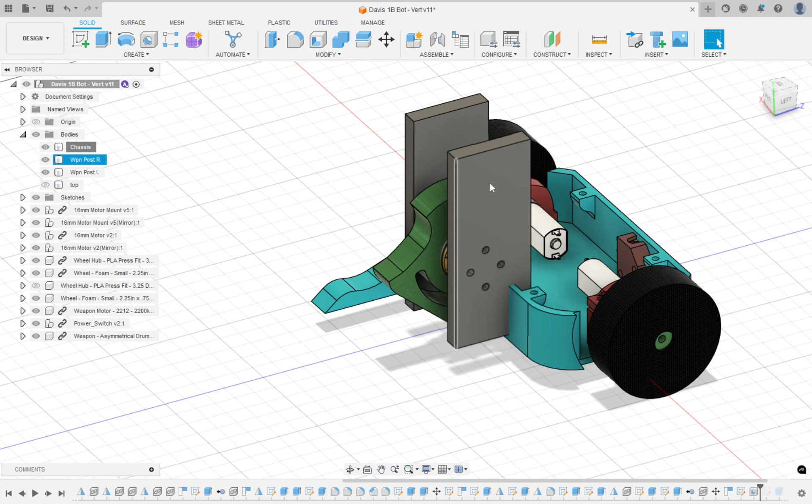All right, so in this video, we're going to go over how to merge these weapon posts with the body and also how to make a hole in the weapon post for the weapon motor on the inside. All right, so our first step is we want to get rid of these weapon posts using the eyeballs.

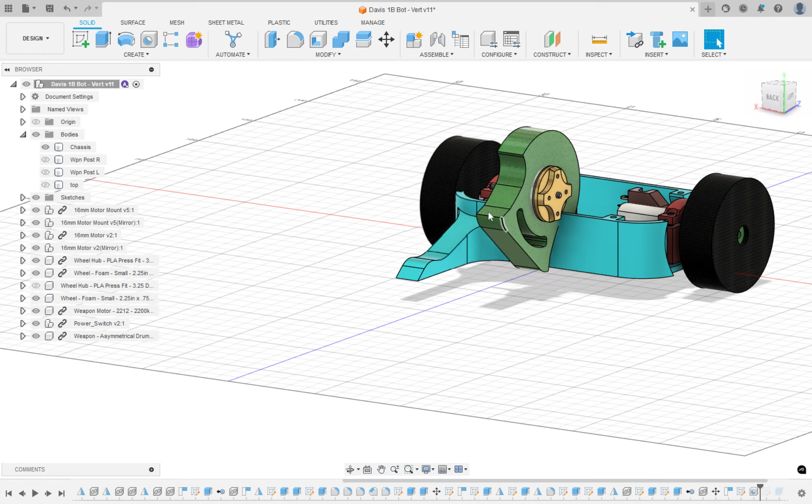And you see this little nub right here? This nub is kind of in the way, so we have to make a hole for it on the inside of the weapon post. So I'm just going to change my view real quick. All right. And I'm going to bring back the weapon post that's next to the one with the 4 holes. For some of you, it might be the left one. For some of you, it might be the right one. So I'm going to bring back my right one because that's the one I need.

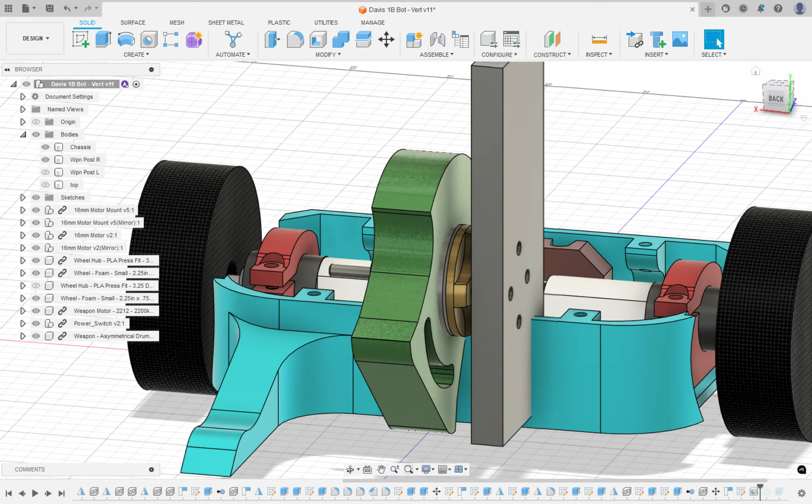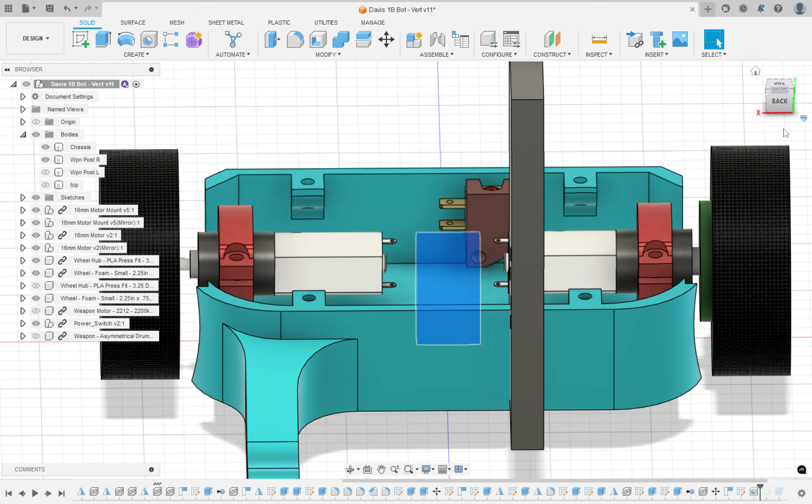Now, I'm going to get rid of the weapon motor and the weapon so I could see my weapon post. So I'm going to find it. I can easily find it by clicking on it and it'll underline so I know it's this. Now I could click on the weapon motor and it underlines so I know it's that. So now I just have the weapon posts. All right, so what I have to make is a little divot, a hole right here. So I'm going to create a sketch on the inside face of my weapon post.

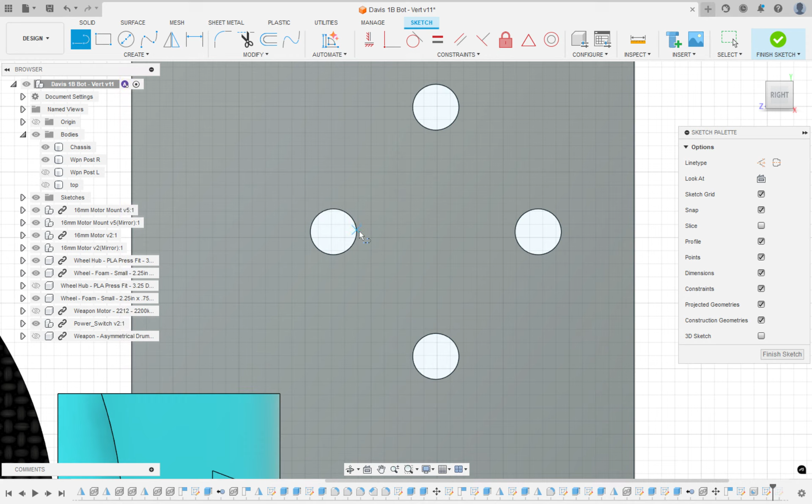And the easiest way to do that is using the line function and a point. So it has to be in the center. So I can either make a line between here and here or a line between here and here. So I'm going to hit line. I'm going to make sure it turns into a circle. I'm going to go all the way to the other one, make sure it's a circle. And it's going to want to create another line, hit escape for that.

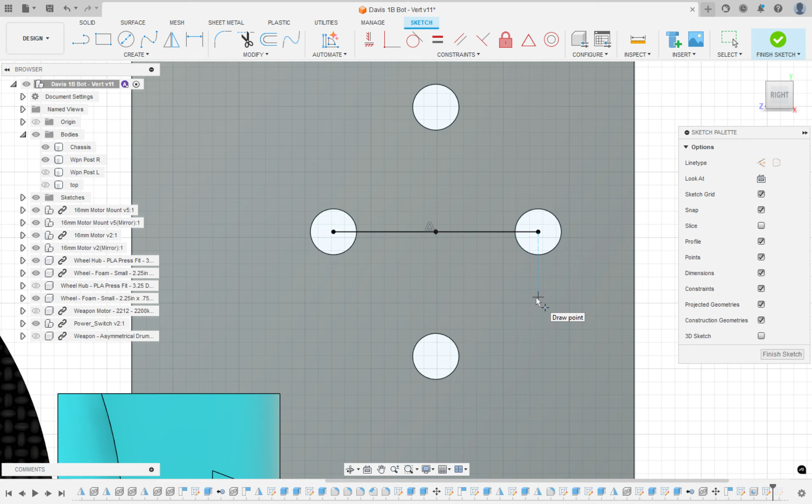Now I want to make a point in the center of that line. So I'm going to go to create point. And you just slide your mouse along the line. And remember, a triangle is going to pop up whenever you reach the center of a line. So I'm going to click. Now I have a point. I'm going to hit H for hole because I want to make a hole there. And it's asking me, where do I want to make a hole? Well, I want to make a hole on this point.

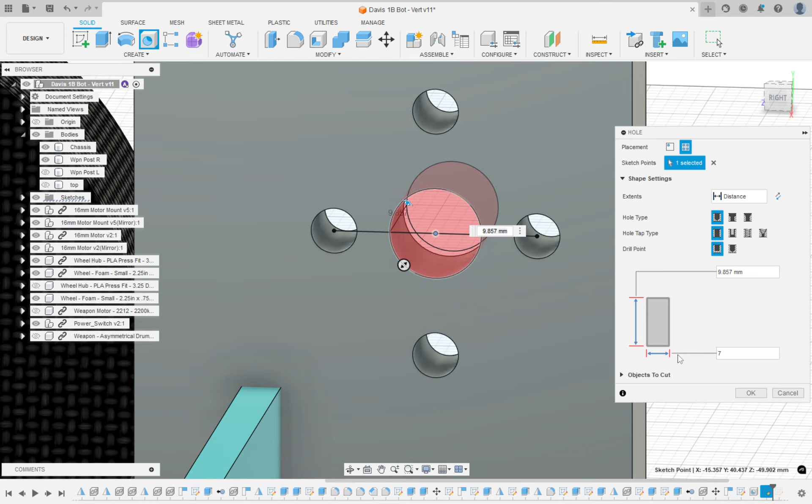Now, the hole, though, has to be 7 millimeters in diameter, so 7 millimeters wide, and it has to go in the post 2.5 millimeters. So what that means is always change drill point to flat, which I'm going to do right now. I'm going to make the width of the hole 7. All right, if you look at the image, it goes how wide the hole is. It's 7. And now I want the hole to be 2.5 millimeters deep. So I'm going to type in 2.5 in this box.

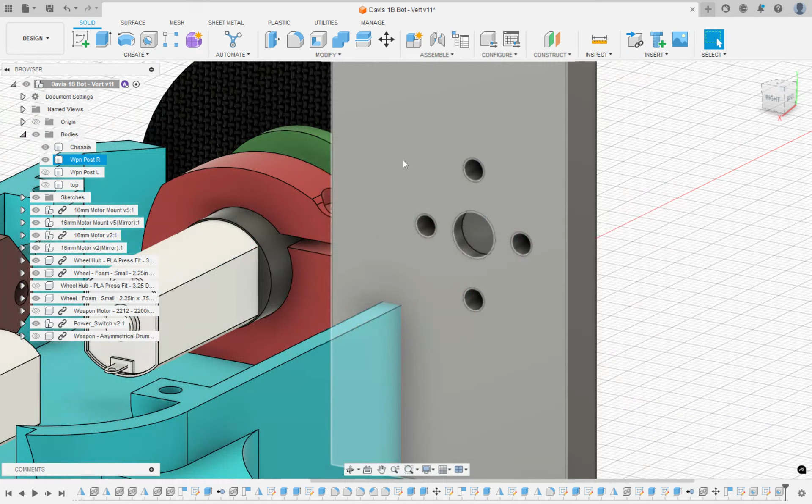And now I have a little divot for my weapon motor's butt to sit in. I'm going to hit OK. And now I have a hole here. Now that's what I wanted. All right. Now, what I can do is bring back the weapon motor and the weapon. And you'll see there's a little space for the weapon motor to sit in, which is what we wanted.

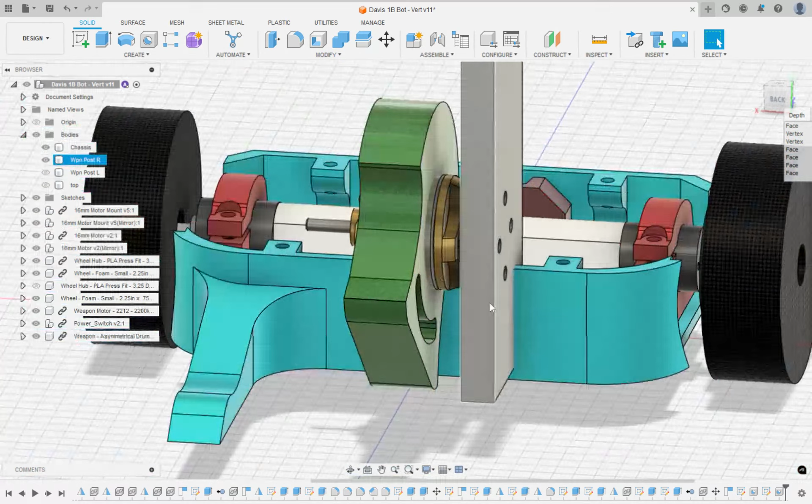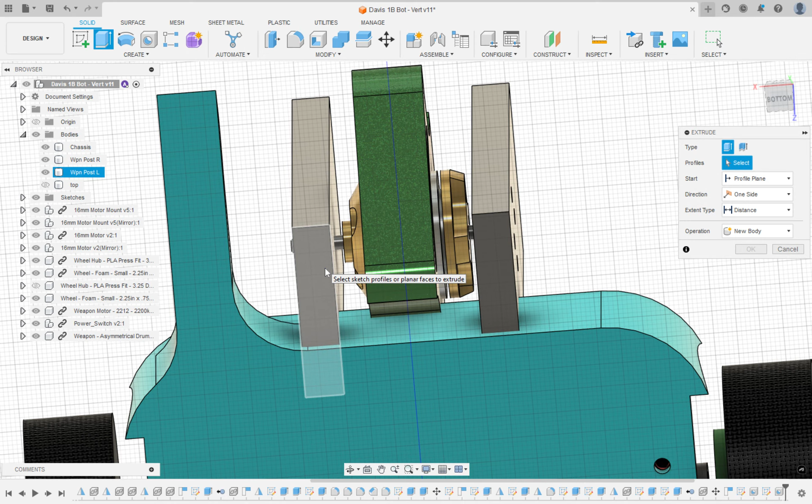Next step is we want to merge these weapon posts with the body. So I'm going to bring back both weapon posts. And this is really simple. We're just going to extrude both of these bottoms to the body, make sure it's on join, and it'll merge. So I'm going to show you how to do that. I'm going to hit E for extrude or click on this icon up here. I'm going to click on, for example, the bottom of this one. And I want it to extrude as far as the bottom of my bot.

So I'm simply going to click on the bottom of my bot. And now it's kind of merged and you can see the color get all funky. It's on join, that's good. I'm going to hit OK. And now it matches, and you can see there's no seam there. So it's part of the body.

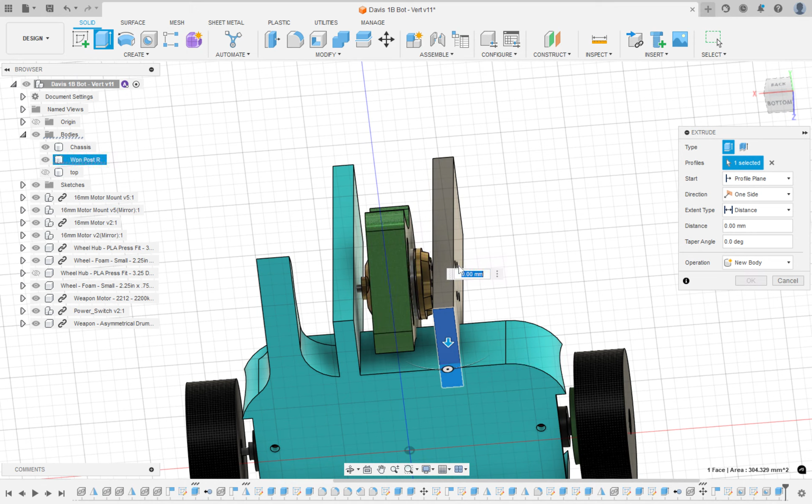I'm going to do the same thing for this one. Click here, I can hit E for extrude or click on that icon. I'm going to click on the bottom of my bot. It gets wonky again, make sure it's on join. Hit OK, and now those parts are part of my body. I could tell because if I click on chassis, it's all one part.

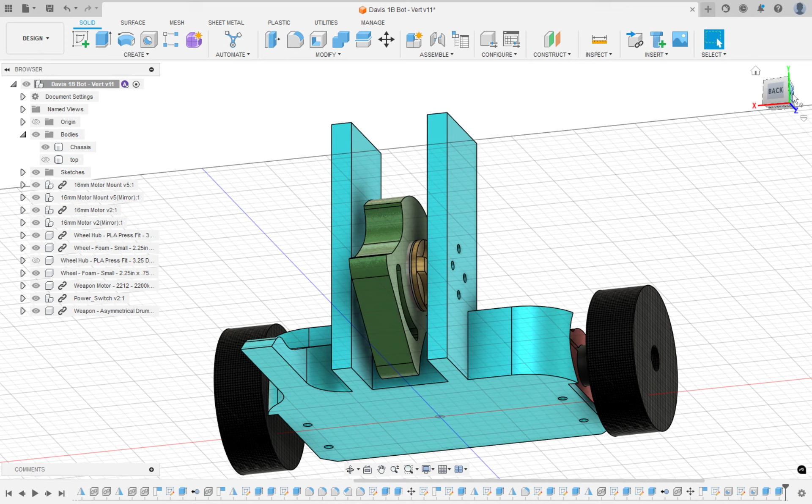That's how we need it. So now we have to shape your weapon posts. Your weapon posts are probably too big, they probably come out too far. So what I'm going to do is show you what shape they should be in, or what shape they could be in. You could do whatever you want.

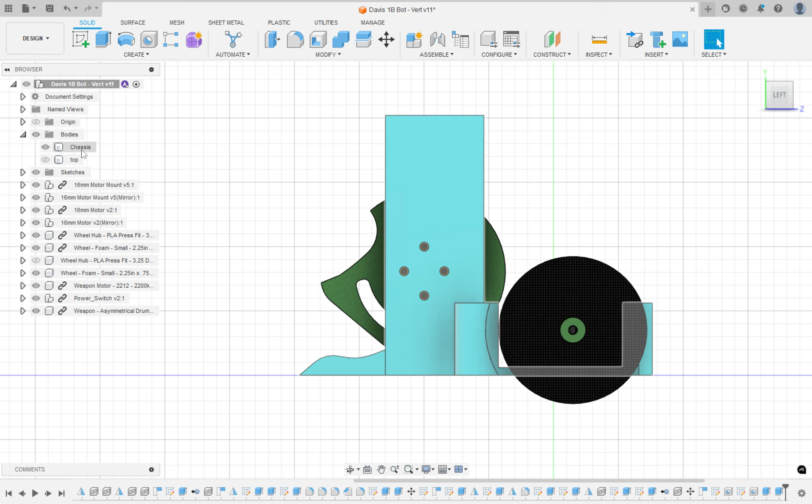So the first thing I want to do is make this body see-through. I right click on, well if your arrow's not open, click on it to open. I'll right click on my chassis, go down to opacity control, change it to around 40 or 50. I'm going to actually make it 40, a little more see-through. Now I can see through my bot.

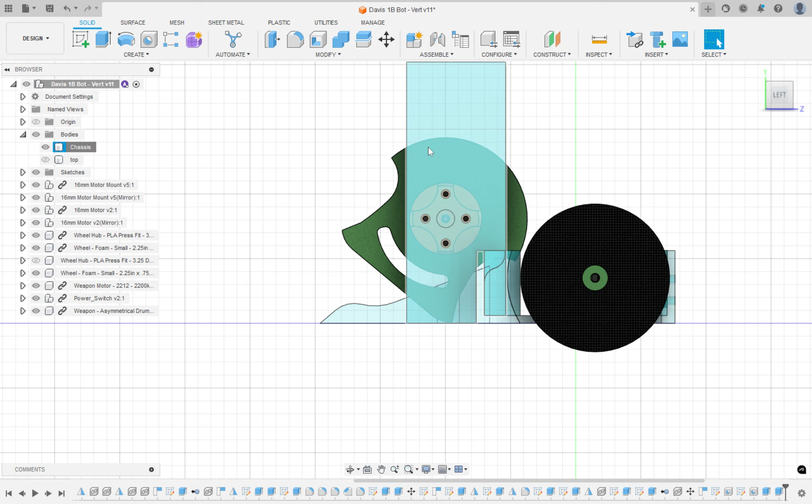Basically, you have to keep material around these 4 points, right? But I don't need all this extra material right here. So what I'm going to do, and I actually don't need much of this material above where the weapon motor is either, is create a sketch on this face right here.

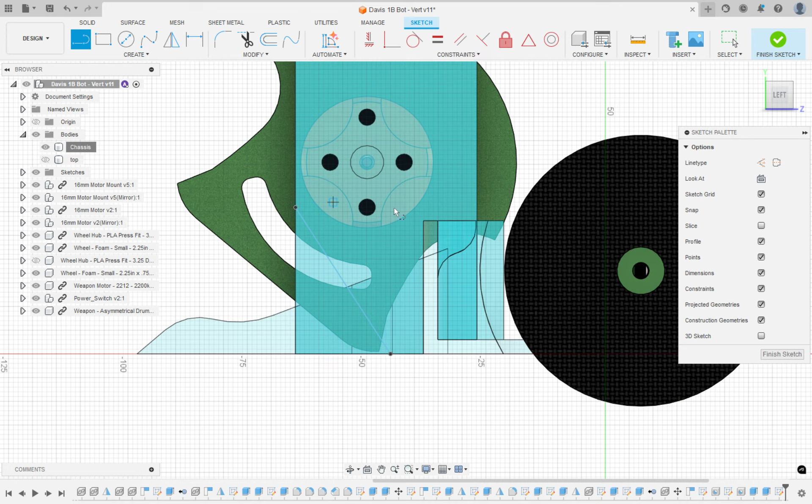And I'm just going to make a line, maybe from, I could either do the back corner here, or this corner here. Maybe to add more material, I'll probably do it right around here. And I'm just going to bring this line up to here. Now all this material right here, I do not need.

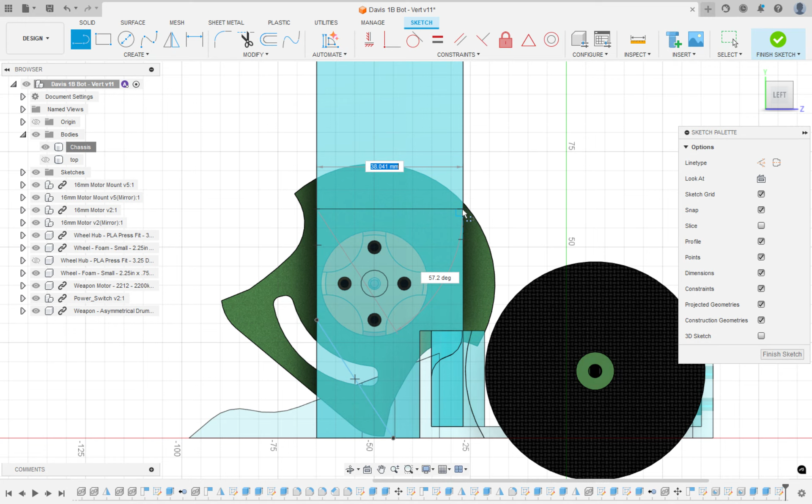And you know what, let's get all this material above this, I don't need this either. So I'm going to make a line that goes straight across, lock right here, and I'm going to get rid of this top section and this bottom section.

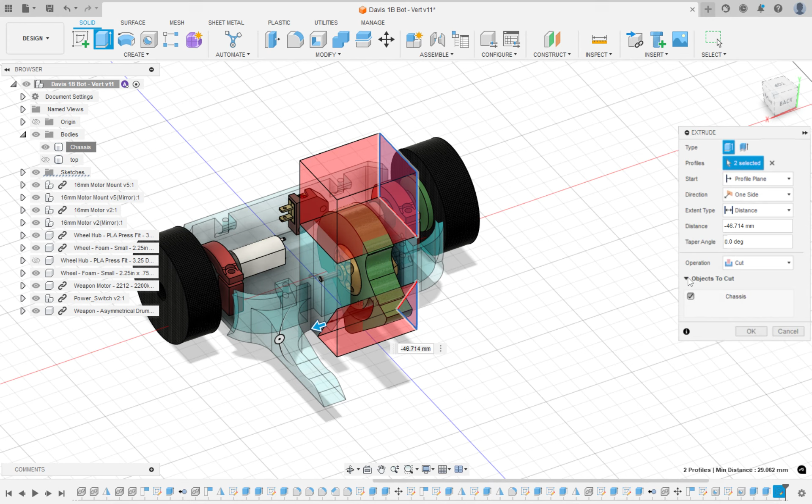So I'm going to hit E for extrude. I'm going to click on this and this. And what I'm actually going to do is, instead of dragging it through just this one post, I'm actually going to drag it through both posts. So I could simply do that by clicking on how far I want it to go, which is the opposite side of the other post. And now I kind of cut through both things. I want to make sure though that I'm only cutting the chassis and not anything else, and I am, so I'm going to hit OK.

All right, so now my weapon posts kind of look like this. I'm actually going to make it 100% again, so I can see what it looks like.

And now, one thing that does have to be tall is that my weapon posts have to be taller than the highest point of when the blade is going to spin. So if you're upside down, you can drive on your weapon posts and your blade can still spin. So the way I'm going to do that is I'm going to rotate the, oops, I did something accidentally.

I'm going to rotate the blade to its highest point. So I'm going to click on it, see which one it is. It's this one. I'm going to right click on it in the list, go to move copy, click on rotate, click on any of these center circles. I'm just going to rotate it to its highest point. So I think that's, then the blade is slanted a little bit, is its highest point.

Maybe kind of around there. All right, I'm gonna hit OK. So now my blade's at its highest point.

Now I don't like the square look of these, so I'm gonna round these off. I'm gonna hit fillet, or F for fillet. I'm actually just gonna click on the icon. I'm gonna click on maybe this one and this one and this one and the other one at the front of this weapon post.

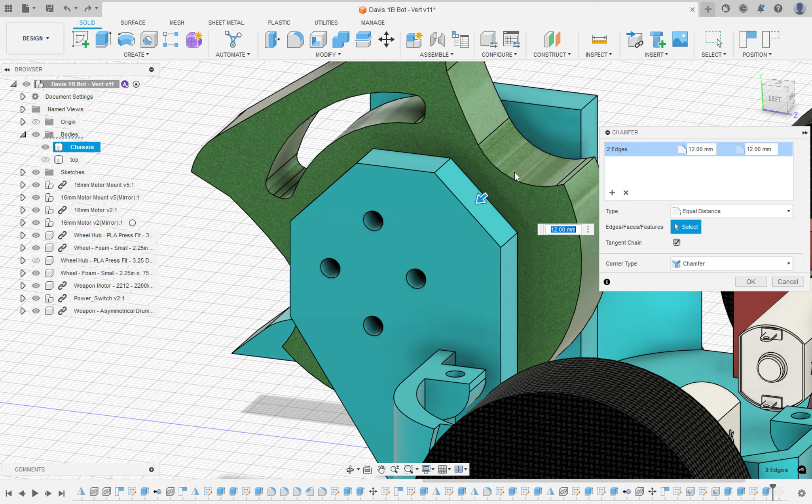All right, so I actually think I'm going to do that. So I did it 12. I could click on this plus sign and add these two as well.

All right, and I could drag it 12 millimeters. I think it was 12. All right, hit OK. So it's up to you what you do.

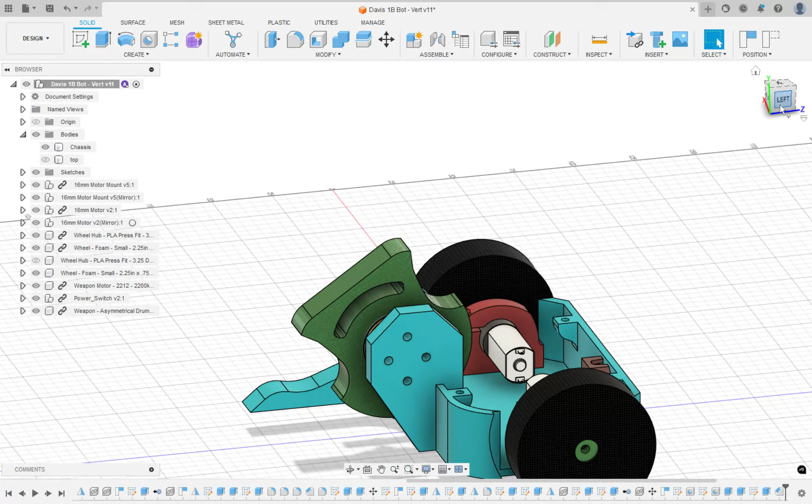The most important part, though, is I need a little piece of material sticking higher than my weapon blade spinning. So I'm going to create a sketch on this face right here. Always hit capture position.

And let's see, I could just do a line. Maybe that's here, here, maybe down here. Doesn't quite matter. I call these bunny ears.

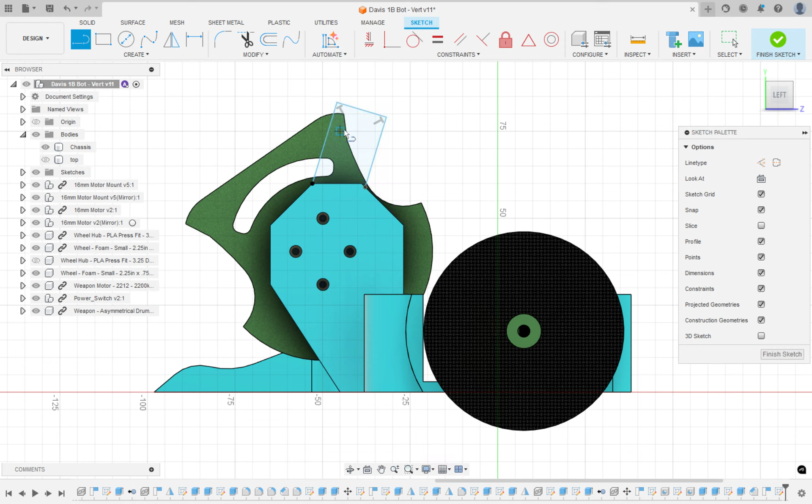Oh, my son is calling on my phone. Hold on. Oh my God. Hello? Yeah, I was recording something. What's up? Okay, I'll do it. All right, bye.

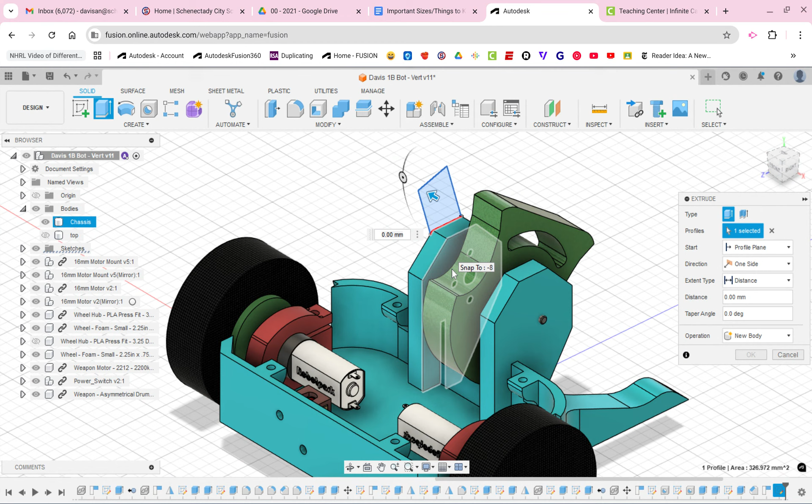All right, sorry about that. So I just made like a square and I'm gonna extrude it to the other side of this post. And now I have like a little bunny ear. I'm gonna hit okay.

All right, I'm gonna mirror that feature real quick. Create, mirror, feature. Yep, I'm gonna do that last extrude here in the timeline.

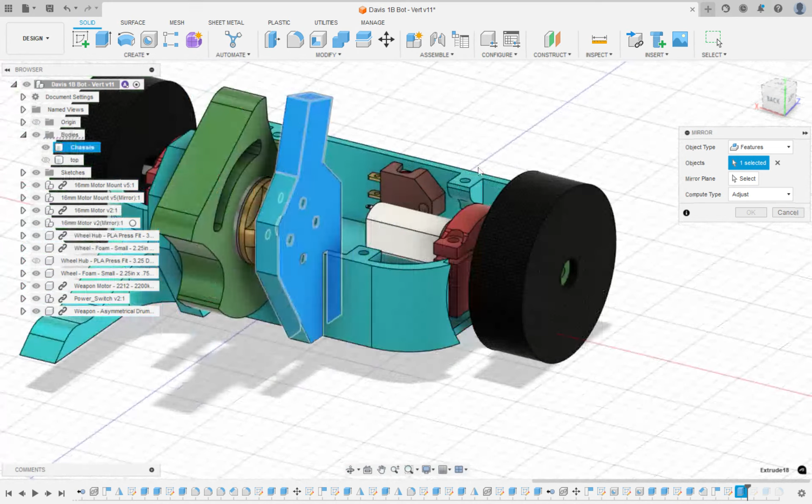Click on, oops, all right, mirror plane, hit the select button next to it, click on this one. Now you'll see that it's added there, hit okay. Now I have a bunny ear on the other side.

All right, but to be honest, I don't like the sharp corners, so I'm gonna fillet these corners just a little bit.

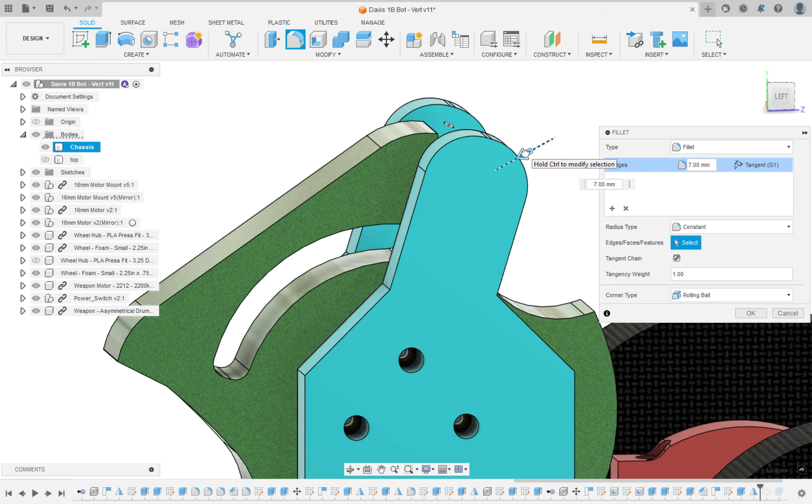All right, you can't go too far because you'll see it kind of goes crazy. So I made it just a little rounded there. Okay, I'm gonna hit okay.

And for now, I am done. And what I am gonna do though, is I'm gonna add some material to this to make it stronger. So I'm actually gonna maybe

fillet like here and here and maybe the side here and the other side there to add more material to make it stronger. All right, you see how that material is getting added there?

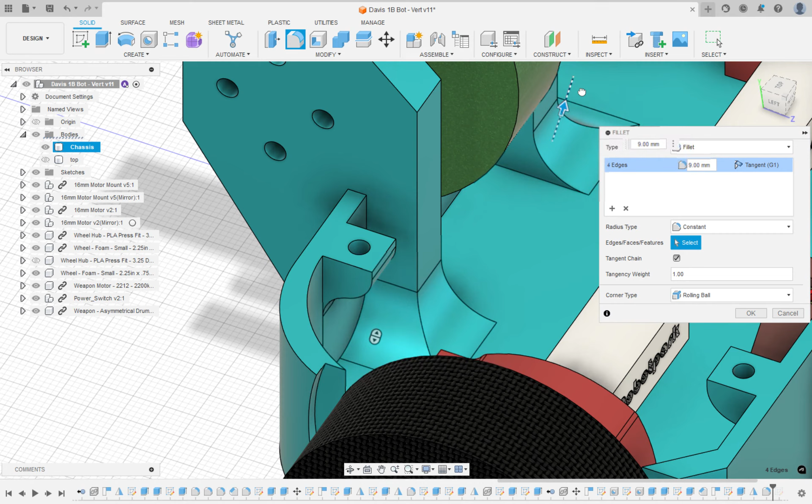So it kind of makes it stronger so it doesn't just snap off maybe on a big hit or something. All right.

And I'm gonna do the same thing a little bit to the outside, these edges here. So I'm gonna do fillet maybe here, this line here a little bit, this line here, that, oh, wrong one, that line there.

Let's do that again. So I clicked on some wrong thing.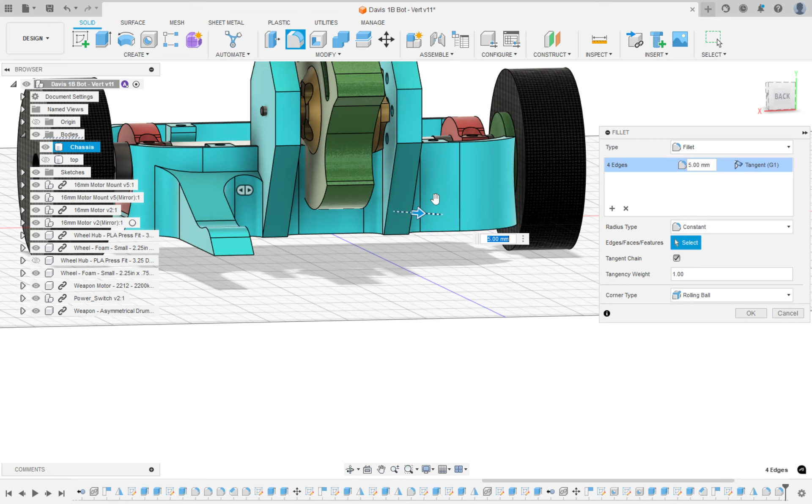If I drag, kind of adds a little bit of material there. All right. Now one side has a fork, one side, the other side doesn't. I don't know why I did that, but ignore that. The idea still matters.

Just fillet things to make them stronger because it adds more material. Now I'm gonna hit OK. And now for now, my bunny ears to my bot